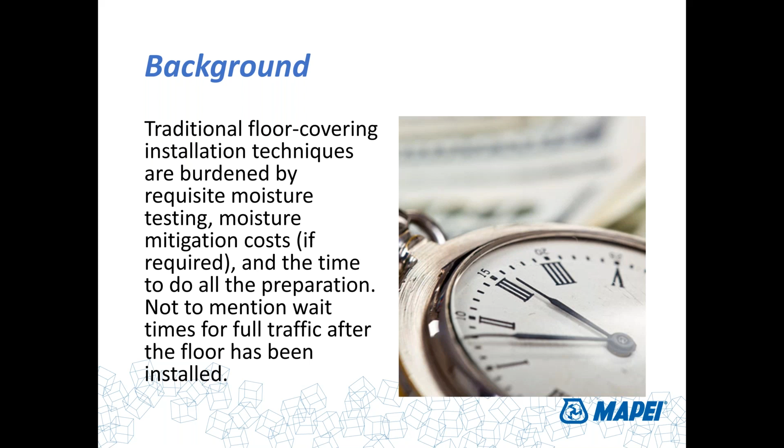Well, with the Mapecontact products that we've introduced to the family, and particularly this one, the Mapecontact SRT, which stands for sound reduction tape, they are double-sided, high-performance tapes that do not require moisture testing. They're suitable for concrete slabs up to 25 pounds of moisture, 100% RH. pH has got to be less than 12, concrete like 5 days old. They provide their own moisture vapor barrier as well as a bonding solution, and allow for instant flooring installation with a minimum of prep, and also allow for instant utilization of that floor.

So again, if we're talking about the green make-money button, these are the ways to get to that paycheck a lot faster.

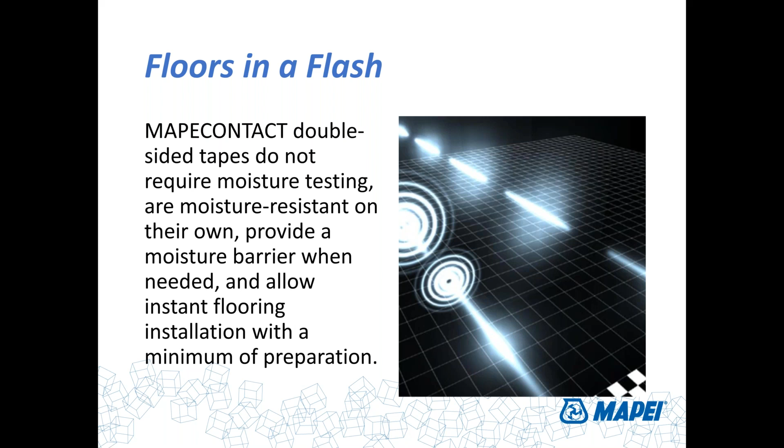The whole point here is that we now have means and methods available to expedite floor covering installation, to expedite the prep, the install, the reuse of that facility, and be able to get to your paycheck that much faster. That's what the Mapecontact products are all about. They're designed to get across the finish line faster, increase efficiencies, and potentially earn early job completion bonuses. In commercial environments, there are incentives to get the job done faster and move to the next job sooner.

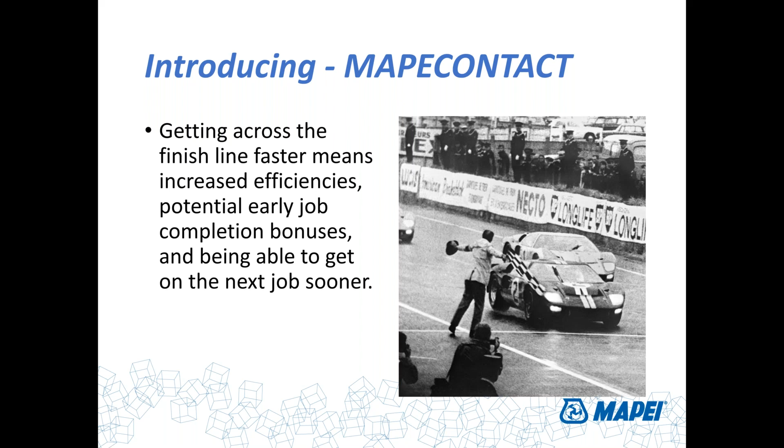Great storyline. Anyway, what we're talking about specifically here is Mapecontact SRT, the sound reduction, moisture resistant tape for resilient and wood flooring installation. It's a double-sided foam core dry film tape for rapidly and permanently installing solid vinyl sheet, vinyl tile, vinyl plank, as well as prefinished engineered and solid wood.

The foam core is very important for wood flooring applications because of the nature of the wood flooring itself. The backing is not always smooth and flat. In many cases it's kerf cut or grooved a little bit to help handle the stability of the material. Those grooves are very difficult to bond to a very thin film. The foam tape, which is 1/16 of an inch thick, is able to compress and expand into those voids and increase the overall bond. That's why it's there.

That foam portion of the tape is also the mechanism by which we get some really good sound attenuation data points, which we'll talk about later in the presentation.

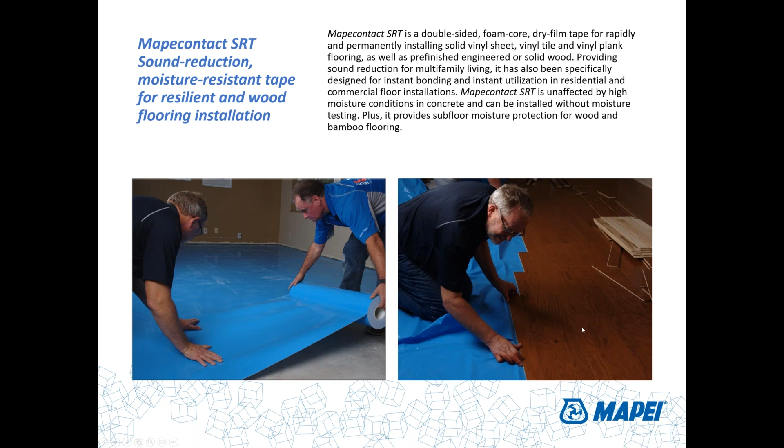So as long as you keep that blue release liner on the surface of the tape, you'll have infinite working time. I will caution you to leave that tape covered as long as you're not using it. If you happen to step on an open field of Mapecontact SRT with your shoes, it will rip your shoes off, followed by your socks, followed by the bottoms of your feet. Very sticky, very aggressive stuff. So keep it covered and avoid walking on it.

It is freeze-thaw stable. I think it's very important to know that this product has a range of usability from something like minus 40 degrees Fahrenheit up to 240 degrees Fahrenheit, a wide range of usability. So, covering over my MAPEI logoed shirt when I say this, if you need to install wood flooring at 12 degrees Fahrenheit, this is the only way to do it.

It has that level of performance. These kinds of products like Mapecontact SRT are used in a wide variety of applications, including exterior bonding of metal surfaces, and in a lot of cases for the wind foils on top of a semi-tractor trailer truck.

A lot of that is put together with these kind of foam tapes. The emblems on your cars are not put on there with rivets anymore. They are usually bonded with some sort of version of these double-sided high-performance acrylic tape systems.

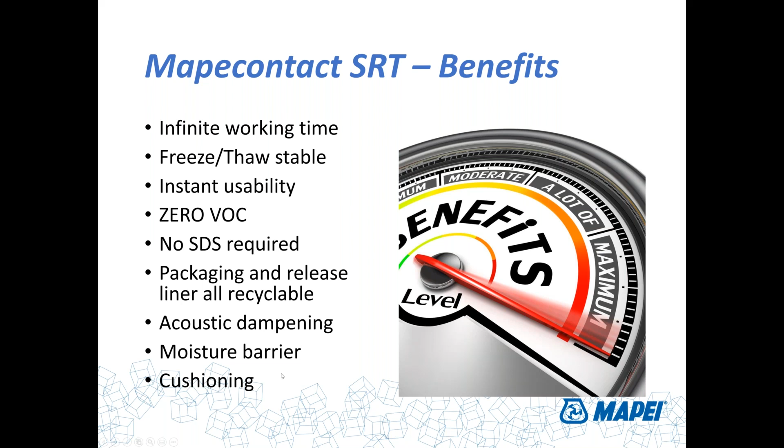Additional benefits I mentioned before - we've got that releasable system. Everything is recyclable. There's no smell, no VOCs, infinite working time and shelf life. That is another very important aspect. It doesn't necessarily need to be stored in a protected environment. Every adhesive we have out there says you've got to store it in a warehouse between 40 degrees and 90 degrees Fahrenheit. This tape you could leave in your van in Wisconsin in the middle of the winter at -5 degrees outside, and it's going to be totally fine. It's unaffected by those kind of temperatures.

Instant functionality we've talked about, and there's no cleanup. Here we're talking about something that's laid on the floor - you pull back the release liner, install the floor covering. There's no goop to get on your fingertips that are going to get on the surface of the wood flooring. No necessary need to clean up, no need to have a can of mineral spirits or WD-40 to clean your trowels, to clean the surface of the wood flooring, and so on. You won't need to deal with that. And definitely there's no trowels involved. Again, not a huge expense, but trowels do wear out.

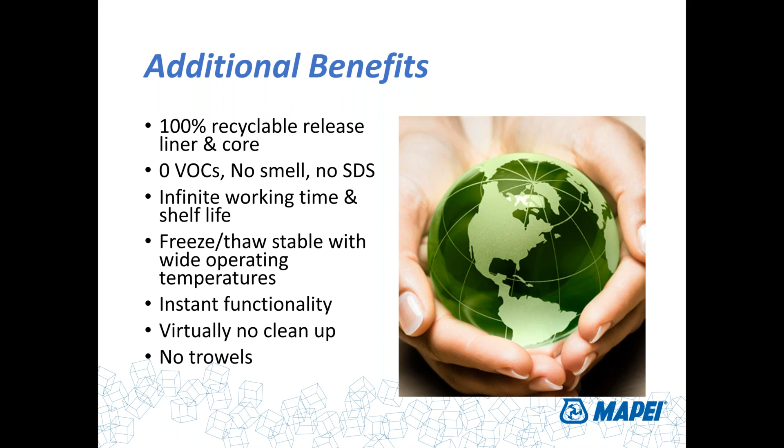In the case of our products like Eco 995 or 985, you need to use a trowel clip associated with that—a lot of shenanigans, if you will, involved in the application of a liquid adhesive for wood flooring compared to Mapecontact SRT.

Another benefit to consider is what's happened over the last couple of years, particularly in the supply chain environment, when we were having massive difficulty providing urethanes, MS adhesives, or even water-based adhesives during that crisis. The tape systems were always available. It's not necessarily a problem for us today, and hopefully we'll never face that perfect storm again—supply chain issues, COVID, the great freeze in Texas which shut down all the urethane plants making the raw materials we needed, and so on. Hopefully that will never happen again, but if it does, you can always count on the fact that these tape products are available for use.

One benefit I keep forgetting to mention is that these are relatively lightweight products. The roll you saw being installed a few slides back is approximately 500 square feet per roll, and it weighs maybe 40 pounds. To compare, the same amount of urethane adhesive to do the same job would require 220 to 240 pounds. So I don't know about you, but I'd rather throw a 40-pound roll of tape over my shoulder as opposed to schlepping a bunch of 72-pound buckets of Eco 995 to the job.

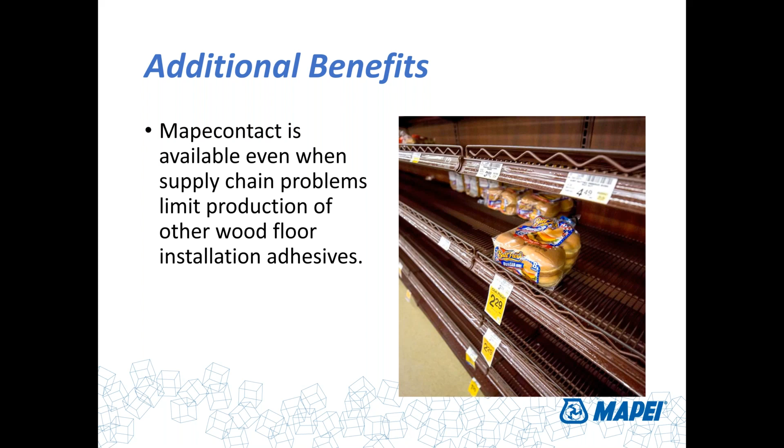Anyway, those are some of the benefits of the SRT. Where Mapecontact SRT fits within the line of MAPEI's wood floor installation materials, it's really at the top of the food chain for a wide variety of reasons. For those of you who are MAPEI people, we have four urethane adhesives and two MS-based adhesives, all of which are great products and do phenomenal jobs, but each one is a little different from the other.

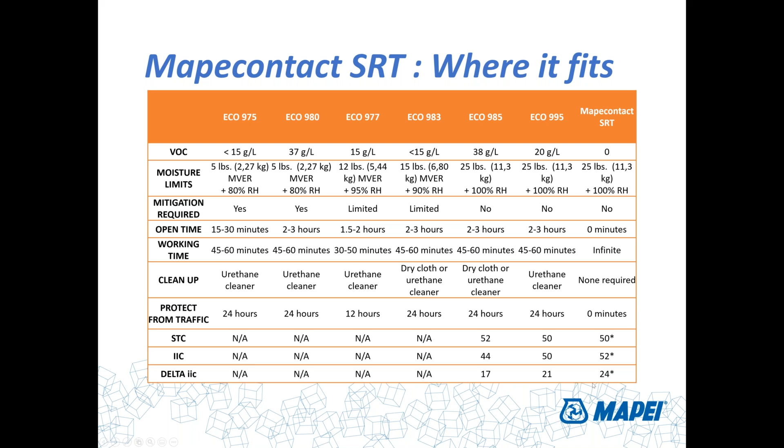One important thing to look at in the lower right-hand corner are those STC and IIC numbers. All this is defined and available for you on the technical data sheet on the MAPEI website online. But the most important and interesting point is that delta number of 24—a very statistically significant number for acoustic dampening. Most of our urethanes and MS adhesives are in the 17 to 21 range, but Mapecontact SRT beats it in a single application with a number of 24.

Looking at the acoustics a little closer—the STC, IIC, and delta numbers—985 in the upper left, under 3/4 inch solid wood flooring, has an IIC of 17. 995 with 3/8 inch engineered is a 21. We can do luxury vinyl plank with Mapesonic 2 + Ultrabond Eco 360 at a delta of 20. But SRT on 3/4 inch solid oak has a delta of 24—compared to 985, that's an increase of 7. That's pretty significant. Engineered oak flooring is 23 IIC on 3/8 inch, and luxury vinyl plank is 24 as well.

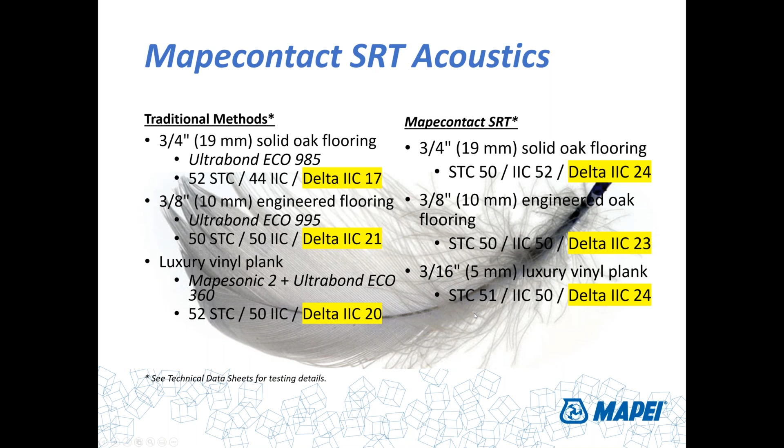So all of this is really good acoustics, and keep in mind that this is a single step application. If you go back to the luxury plank for traditional methods including Mapesonic 2 or a 2mm Mapesonic RM reground rubber, there are multiple steps and multiple layers of adhesive that have to go on there. Why go through all that hassle when you can do it with a single step with Mapecontact SRT?

Where can you use the product? Virtually anywhere, as far as I'm concerned. Residential, commercial, multifamily, apartments and condos, anywhere where you install pre-finished engineered or solid wood is totally suitable for the use of Mapecontact SRT.

No questions, no concerns. How does it work? What are the steps necessary for prepping and installing Mapecontact SRT? First and foremost, you've got to clean the substrate and remove all the debris, if any. This is extremely important. All the dust has got to be taken off.

If there are any defects in the subfloor, cracks, dips, divots, bird baths, gouges, and so on, all of those need to be filled using a high moisture resistant material like Planiprep PSC, Mapecem Quickpatch, or Ultraplan Extreme 2 if you're going to level anything on top of that. The reason that's important is you're applying a moisture vapor barrier on the surface, and you want to make sure your prep materials are suitable for that kind of application as well.

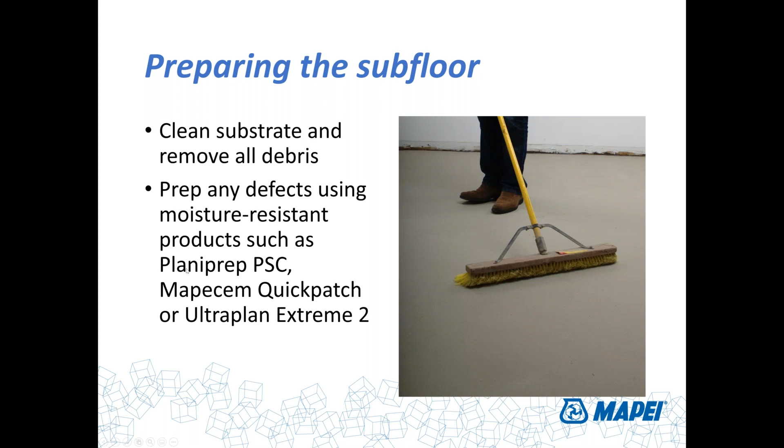So that's very important, and it's key to say that dust is the biggest problem for the installation of Mapecontact SRT or MRT as far as that goes. These products are extraordinarily aggressive, very sticky stuff, and they're going to stick like gangbusters to dust. But dust, as you know, has no adhesive properties whatsoever, so it's going to need something to remove it.

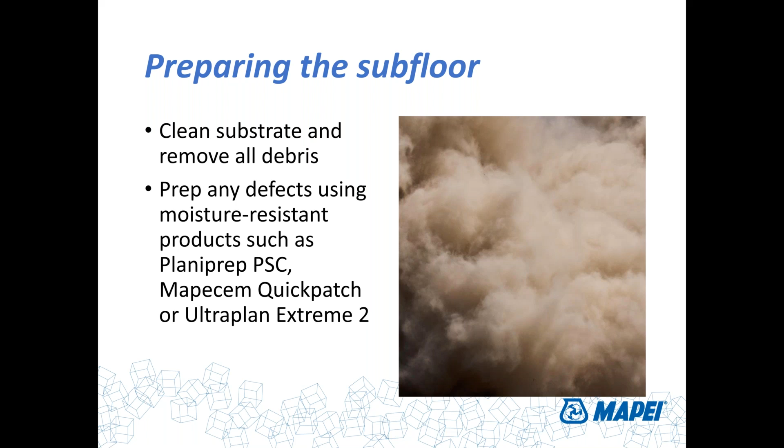Use of a vacuum, use of a damp mop, something, whatever you can do to minimize the amount of dust on the floor prior to the installation of any of our tape products.

And over on the right, you'll see our friend Tony Ziola helping me out with that project. Somebody to help place it on the floor and make sure all the seams are lined up, and maybe a third person to come behind and broom that stuff to the floor. When I say broom it, we're talking about the use of a shop broom to help press the tape down to the subfloor as tightly as you can.

Start in the middle, then work towards the walls. Butt the seams together tight. You don't necessarily want to overlap them. If you do overlap them, you can double cut them to remove the excess, and you wind up with a smooth surface. Definitely broom or roll the surface to ensure proper contact.

Again, these are all based on pressure sensitive adhesive systems, and pressure sensitive means they work better the more pressure you put on them. So they like to be walked on. They need to be walked on. They prefer that you walk on them as soon as you get them on the floor.

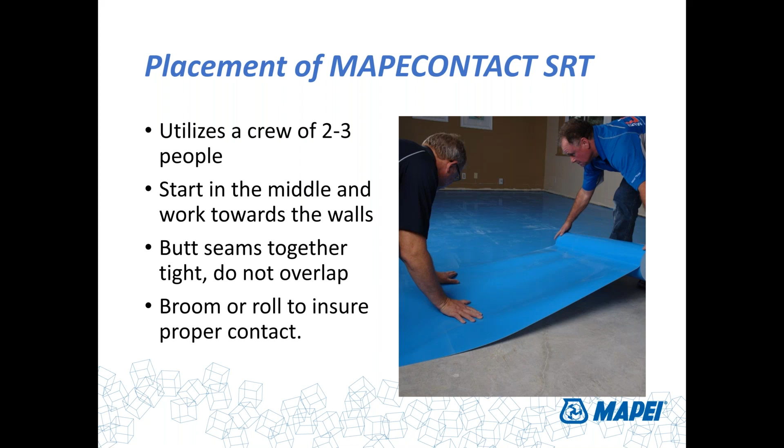One other last little note here, another benefit of using Mapecontact SRT for wood floor installation is I've never been more comfortable in my entire life on my knees installing any kind of flooring ever. You're actually working on a cushioned layer of material, a 16th inch foam system. So when you're running your knees across the floor laying floor, it's one of the most delightful experiences you'll ever have compared to trying to schlep your bare knees on top of bare concrete. Another little benefit I forgot to mention, but there you go.

So anyway, the wood floor installation, I'm going to get a little bit more detail on this with some other slides, but one thing I'm mentioning, everybody's going to understand, when you put wood flooring together, it's a tongue and groove type of assembly.

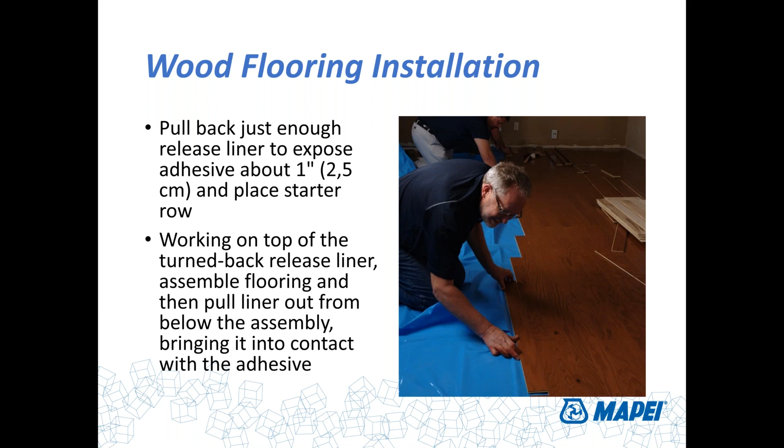You have to slide one piece into the other to install the floor covering. If you try to install wood flooring on a super sticky substrate that won't let you slide, you're going to have problems. So in the next couple slides, we'll teach you how to install on that release liner, kind of like the old pull-the-tablecloth-out-from-underneath-the-silverware trick. There's a bit of a trick to it.

So how do we get started? First, let's talk about how Mapecontact should be placed on the floor. We prefer that when you run the big rolls of Mapecontact across the floor, you run them perpendicular to the direction the wood flooring is going to go. So if you're running the wood flooring left to right, you want the rolls of Mapecontact to go perpendicular. That's important because as you pull the release liner out from underneath the wood flooring, you don't want a seam of liner right underneath a seam of the wood flooring.

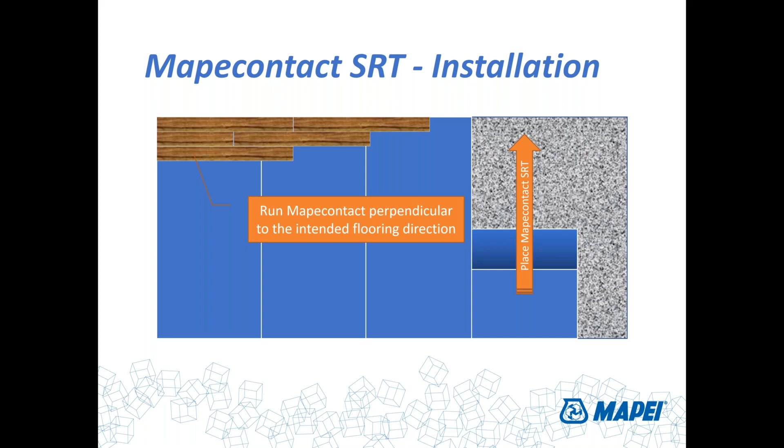Run the Mapecontact perpendicular to the intended direction of the flooring, okay? Next, pull back a little of that blue release liner off the surface of the floor and mark a chalk line for the starter row at the distance you're going to use for the expansion zone for the wood flooring you're installing. You need to follow the installation instructions from the flooring manufacturer for what kind of expansion zone is needed. But every wood flooring I know of requires an expansion zone of at least 3/8 of an inch to 1/2 an inch around the perimeter of the room, to compensate for the fact that wood grows and shrinks as humidity changes.

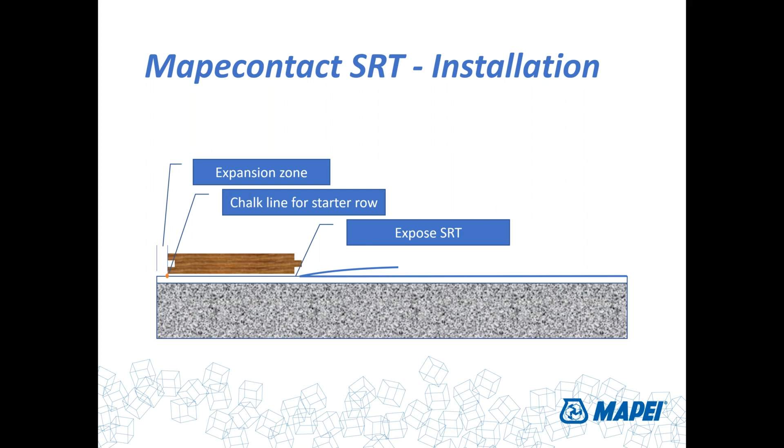And if you put this up tight against the wall with no gaps, when the flooring expands because of increased humidity, it's going to push against the wall and cup it off the floor -- not a situation you want. So again, mark the expansion zone, run a chalk line for the starter row, and expose the SRT just wide enough to allow you to install that first layer of wood along that line, okay?

Next, first press your starter row into the material and get it down nice and tight, then pull back the release liner about 1 inch away from the piece you just installed. Then bring another piece of wood flooring, place it on top of the release liner, and slide it in to match up so the tongue and groove is properly seated with no gaps. Once that's done, pull the release liner out from underneath that plank and allow the wood plank to drop into the adhesive bed.

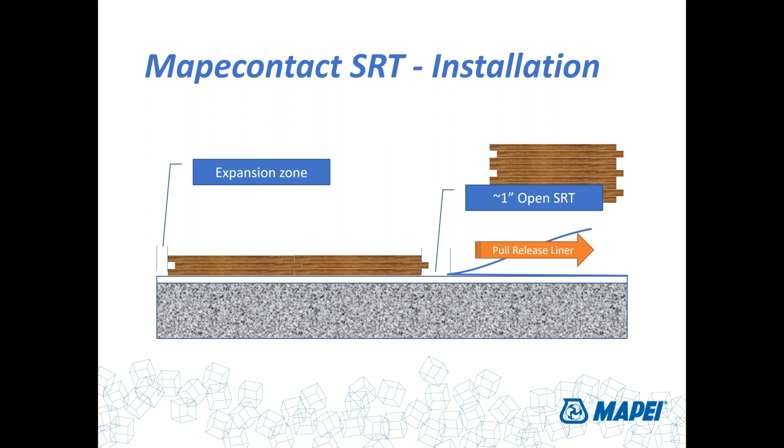Once that's done, you repeat the process of creating an open zone of SRT, then add more rows of wood flooring and pull the release liner out from under it. With some practice, you should be able to put together perhaps 3 or multiple rows of wood flooring, all tight and pressed together on top of that release liner, and simply pull the release liner so all 3 rows drop in at one point.

Think back to those photographs I showed you early in the presentation where Tony and I were doing that installation -- that was, I think, a 3 1/4 inch engineered, 3/8 inch wood plank. I got to the point where I was putting together 5 rows of material at one time and pulling the release liner out from underneath it. So you can really get significant production out of this with a little experience.

And that nifty release liner, in case you're needing something like this, can simply be flipped back over your installed wood flooring and act as a protectant to keep any kind of damage from occurring on top of that floor while you finish the installation.

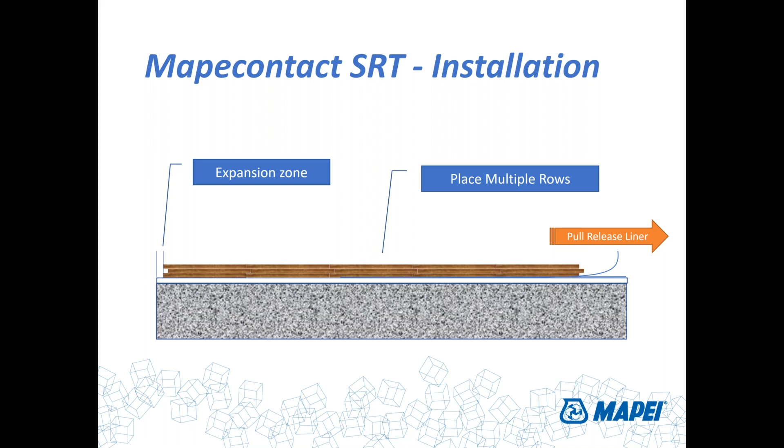We've had instances where commercial flooring contractors with our other tape system, the Mapecontact MRT, went through this same exasperation-to-success curve. They were sold on the concept, thought it was a great idea. The first day on the job, they were calling our sales reps saying, how could you put me in this position? I've never seen something more complicated. But then the next morning we called them back, and they said, I figured it out. It's the greatest thing since sliced bread. I'll never use anything else.

So it is a bit of a learning curve, I'll be honest with you. Those people who have been glue trowelers all their lives are going to have a hard time dealing with a new way of doing things, I'll give you that. But for new people just getting into the trades, and people whose knees are as bad as mine, getting on the floor, they're certainly going to see this as a new way to get things done. I'd encourage you to do what you can to handhold people who are trying to learn how to do this.

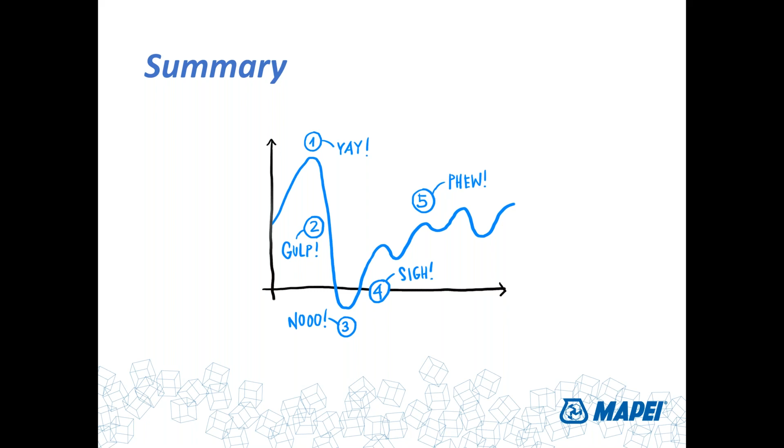Thanks, Jeff. I loved your analogy of Disneyland. So we have a question here, and it's interesting: how much more of a concern is there for an indentation from heavy point loading when you're using SRT versus MRT? Is that a concern even? Does it depend?

For resilient sheet flooring, I'd say yes, that's a bit of a concern. For SRT underneath sheet vinyl or LVT products, it is cushiony, and it's probably something to avoid putting a grand piano leg on top of. But this is wood, so it's not a problem for wood at all.

Perfect, that's kind of what I figured. Okay, so what is the roll size? That's another good question. The roll size for Mapecontact SRT - it's important to know that we offer this in four different sizes. The main product you'll use is a 30-inch wide by 200-foot roll, which is 500 square feet in a roll. But we also provide it in 1 foot, 6-inch, and 3-inch wide rolls.